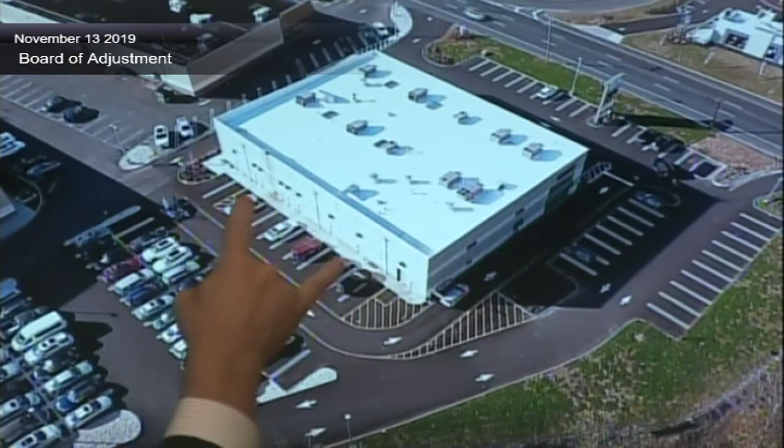Sure, I'll do my best to describe it, and the video should be stationary. On the site plan, if you happen to have copies of it, there were 2 asphalt loading ramps that were put in at 2 of the parking spaces, and it allows a vehicle to be parked, but it's easier to hand truck and wheel materials into the rear door entrances.

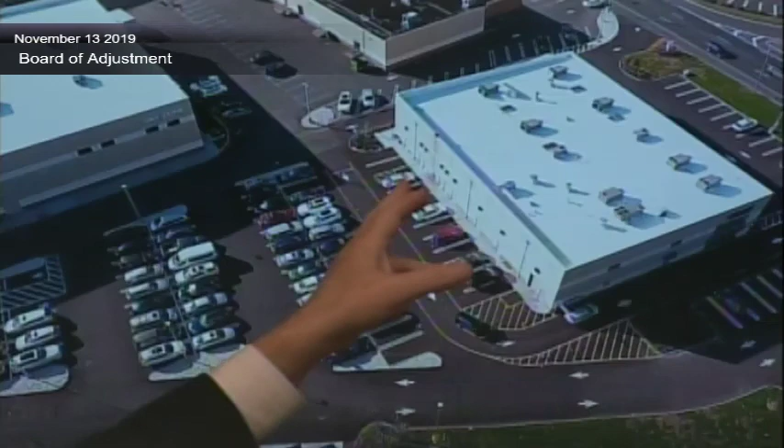My recommendation was we don't want to tear those ramps out, we still want to have access to them. So the idea is, because these stalls are 18 feet long, half of it, 9 feet, would be the drive-through lane, and the other—if it's exactly half, Mr. Titus has a dimension that those ramps are, say, 8 feet, then we'll have a 10-foot lane. But the idea is those ramps would continue to be available.

That may have been the end, that's why I couldn't fast forward it. So I'll just please pause. So the idea is, instead of perpendicular head into the building, we would in essence create the parallel configuration, and the entire drive-through lane that you see would just be moved closer to the building.

But at the very southeast corner of the building, you'll see this cross-hatched door area. That will still allow vehicles to make the turn to get in around that corner of the building. It's not right up against the building. So if you're taking half of the 18 feet, you still have 9 feet to the building.

Yes. Couldn't you do some parallel spots to the building if you pick up some spots there? We could. My thought was, in the event that there's loading, and loading takes 20 minutes, that truck can pull in, occupy what's in between—for example, the ramps—and it lets the drive-through keep running.

So if someone parks there, they better be employees, because otherwise they're... Well, maybe that's what you do. Maybe employee-only parking, and you have some spots that... We can certainly do that, and I'd have to see—we could fit one, it's a little more, so they're parallel, but I'll say one. We could probably fit 3 parallel spots.

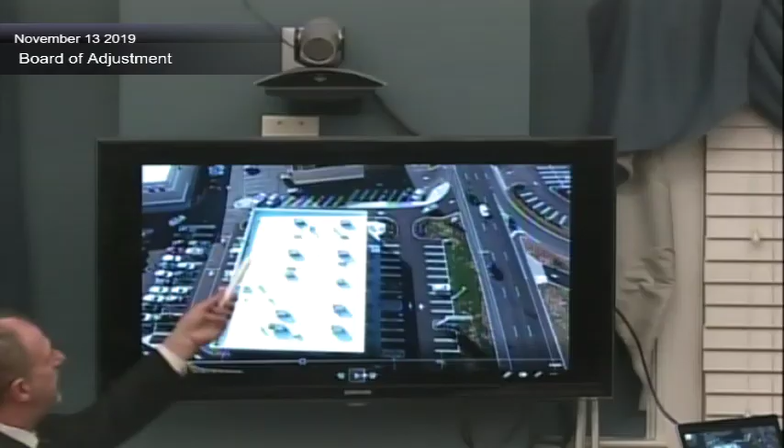It's one of those, if we have ownership interest, if it becomes a problem, that's a good solution. The one challenge of speed humps is what it does to stormwater. We have to make sure we're not creating a puddle in front of the speed hump. And unfortunately, it's not on the picture. I don't know where we have our storm inlets to capture that. I think having somebody hit by a car and then solving it afterwards, when we could probably think about it now and maybe make it safer, would probably be something to think about.

Well, I like to have answers to problems should they arise. I'm not necessarily wanting to solve things that haven't manifested themselves yet. So I always like to have that remedy available. I'm just not sure we're there yet, but certainly, after Mr. Gagliardi, you have commitment from the applicant that he wants it to be safe. Sure, and for liability reasons, it's in his best interest.

Excuse me, Chairman, I wanted to add something. So we looked at this and we had suggested, I don't know why that's striped there, but we had suggested that be closed off. Should this get approved, we suggest that whole island there between the Kinko's and our site be curbed, so there's no cross movement of vehicles.

That's why I think that's why they had striped it. But I think that should be a full curb as well. I think it should be planted or in some way fenced - a real deterrent from allowing someone to come through there.

I agree. The cars are coming off too fast, and there's too short a limited sight distance for anyone to want a pedestrian to cross there. Maybe if they were going to cross, a crosswalk toward the rear of the building. But our recommendation was to close and curb that driveway or island that's partially curbed between the Kinko's and this site.

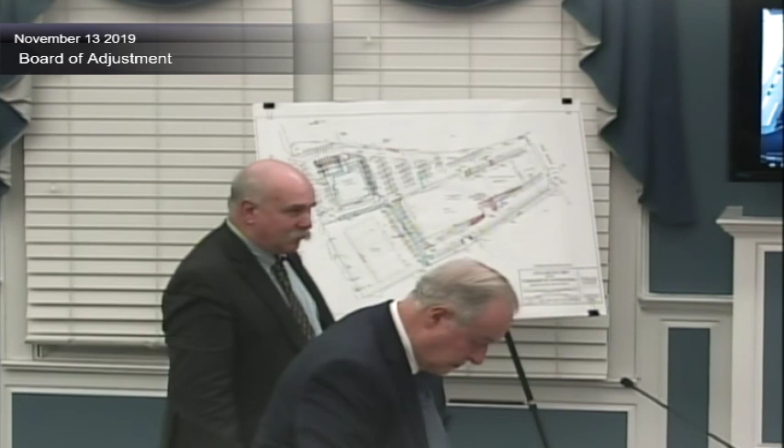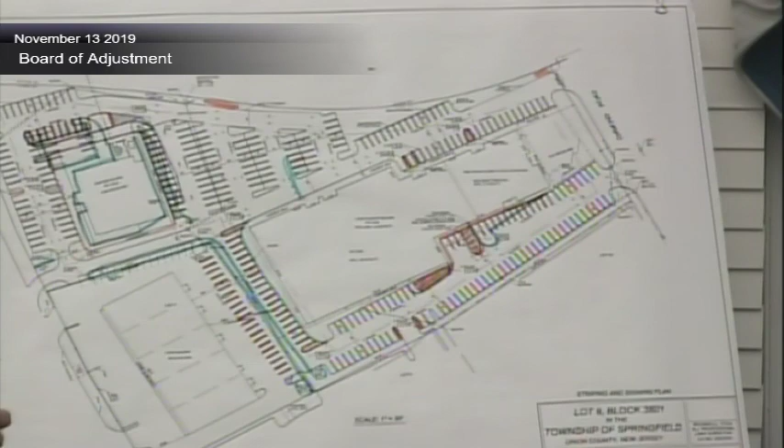The original approval, it was the back building that contained Sky Zone, and we were going to retrofit that building, use the existing building as it was. I thought it was a Burlington Coat Factory discussed. We were going to use the existing building as it was and fix it, not tear it down and rebuild.

And then in the front was a building that was the same size as what's there now. The area of the building that was approved the first time was the same size. What size was that? 13,500 square feet.

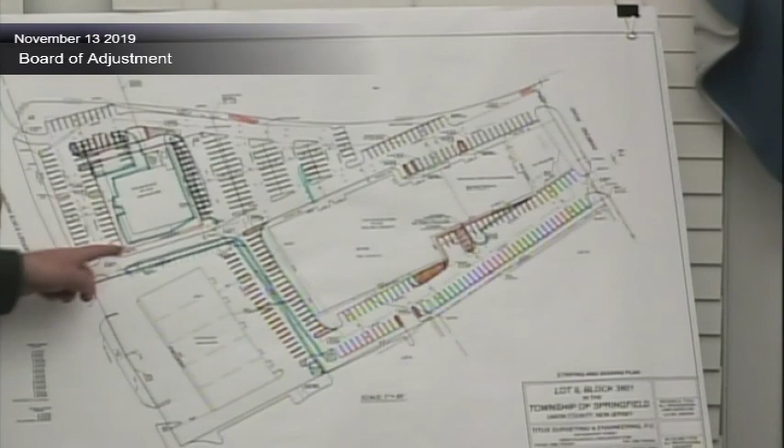The difference was the entrance and the exit were both on the westerly side of the property. But when we went to the DOT for approval, they were worried we were going to short circuit across the center island. There's a U-turn in the center island there, and they were worried the traffic would circulate. So they had us split it up, put the entrance on the west side and the exit on the east side, which is the configuration that the DOT required.

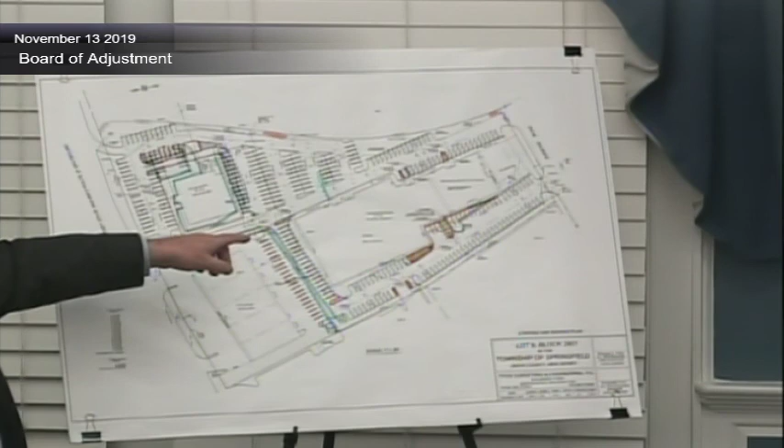But the entrance also came out into the site and then swung back. We were able to convince them that we had control over lot 7, and we could slide the entrance to the west, which freed up some area to create additional parking. So we took advantage of that and slid it over. So the difference between what's here now and the original 2013 approval is the building's completely demolished and rebuilt, but it's the same building proposed in size, 13,500 square feet, which slid a little to the west to give us some additional parking to the east.

And how about the parking that was originally approved? I don't recall that number of spaces.

What I'm showing here is the striping and signing plan with some of the previous layouts superimposed on it. I think we better get this in as an exhibit if they don't have it. I don't think there were exhibits at the last hearing.

And Mr. Titus, what do we call this? What's that entitled? It's a striping plan with previous layout superimposed. I guess we're going to call this A2. When is that dated? November 2nd. So it's current. Yes.

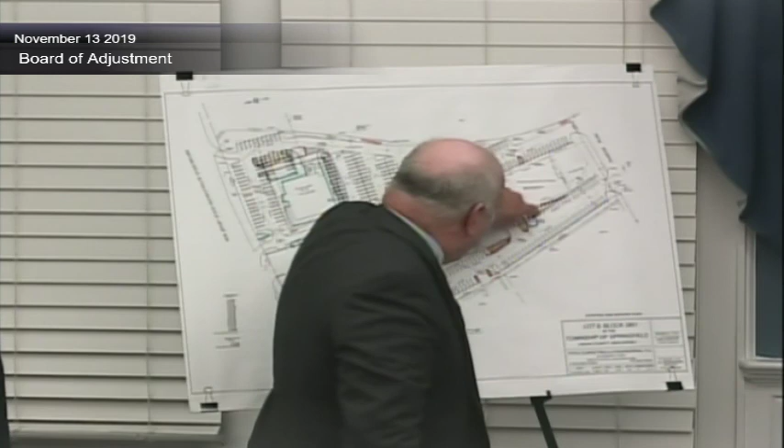So what this is showing, when we came in for Miller's Ale House, we had a loading area in the back of the building, on the west side of the Sky Zone building. It was set up for rolling doors, with 2 loading spaces in there. The tenant didn't need that for Sky Zone because it doesn't have any loading for that type of use. So we met with someone in the engineering department and agreed we could alter the striping in the back. There's a small roll-up door in the back, and we left enough room so a truck could back up to that door if it ever needed to happen. And then we just created a few extra spaces along the side of that building.

Are the extra spaces shown in orange? Those are shown in orange. That's what's there now. The blue is what was originally proposed in the middle when we went to Miller's Ale House.

As we continue around, there was some curbing proposed along the building that was changed to just a striped island, with an additional open area striped out where nobody could park. When we came in for 24-hour fitness, we wanted a cross-through between the two properties, so we created that and eliminated maybe 3 spaces along there.

When we came in for 24-hour fitness, a lot of the discussion was about the amount of parking there. We saw an opportunity to create more parking between the lot on Building 7 and 24-hour fitness. This was originally a 24-foot driveway through here.

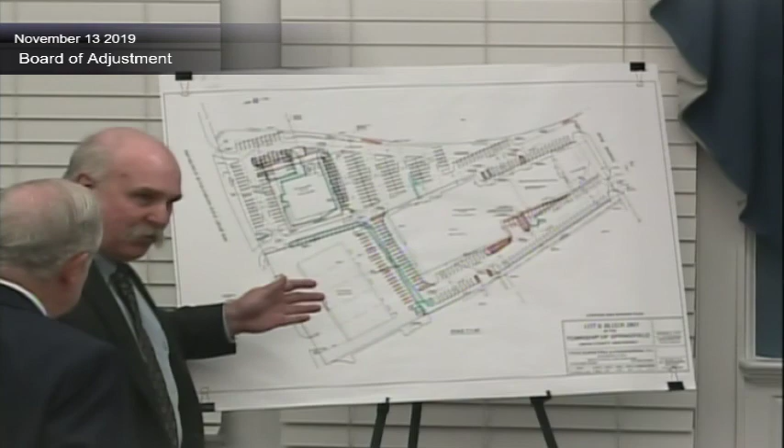There was going to be no parking along the northerly side of Sky Zone, no parking at all along here, and we created 20 spaces along the building, joined up with 22 spaces behind Kinko's or Lot 7 in the back, which is underutilized. Very few people ever park there, maybe a few employees once in a while. So it opened this up, and there's 42 spaces in there that we're proposing as shared parking.

Between the two buildings we eliminated two curb lines - one to the north of Sky Zone, and one to the south of Kinko's. Between the two curb lines there was just going to be some plantings. So that created 42 spaces that weren't there before, that could be used by 24-hour fitness, Sky Zone, or the restaurants.

I'm going to turn this over. A2 consists of two sides. No, the first - or you want to mark this as A3? We could do that. Let's mark it A3.

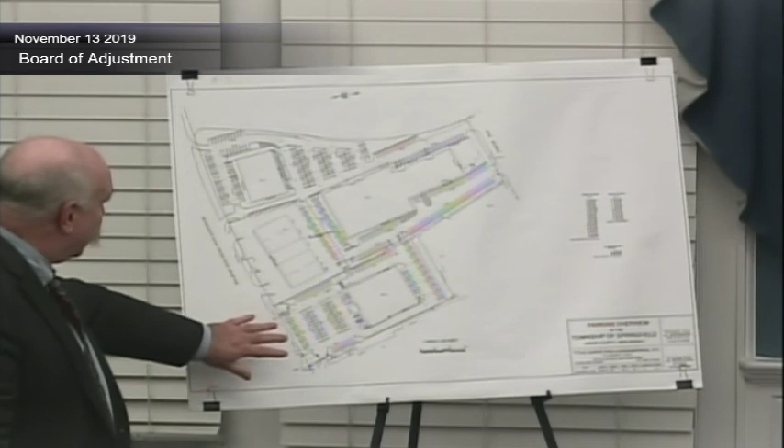This shows both sites together - the 24-hour fitness site to the west, and the Sky Zone, Krispy Kreme, Lot 7 to the east. This shows all the parking for 24-hour fitness and how it would interact with this site.

We do have a crosswalk between 24-hour fitness and the parking behind Lot 7 or Kinko's. That was proposed on the original site plan, and it was discussed at the meeting that people from 24-hour fitness would be able to utilize this parking as additional overflow parking.

There's also a sidewalk at the cross-through between 24-hour fitness and the Sky Zone building, with a crosswalk so pedestrian traffic can get between the buildings. So this area is set up as overflow parking for 24-hour fitness, but there's also overflow parking for Sky Zone and Krispy Kreme.

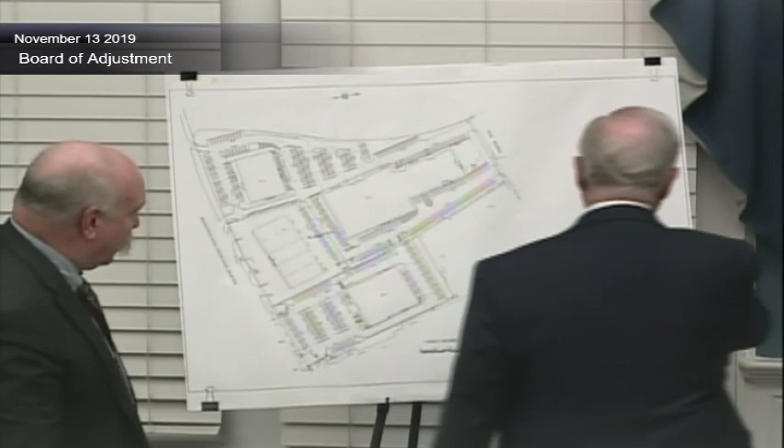So how many parking spaces between the three properties? There's 231 on site on the Krispy Kreme Sky Zone site, 133 on Lot 6, which is the 24-hour fitness site, and 42 shared parking spaces in the area between Lot 7 and the other lot. There's like 408 spots altogether from our arithmetic. It's fairly decent. Is that about right? That's about right.

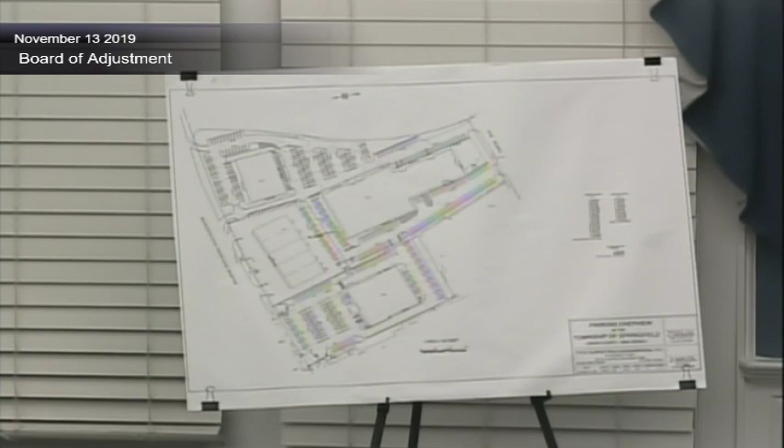What you have is three properties working harmoniously together. Correction - you're also using Lot 7, Kinko's, so that's four. There's Lot 6, Lot 7, and Lot 8, and then Krispy Kreme - this is all one lot with two principal uses.

So, three properties - but realistically, a good amount of those spots are worthless for someone going to Krispy Kreme or Moe's or whatever's going to be there. Most people probably won't walk a half a mile for a donut. We were discussing a crosswalk between this area and maybe this side of the parking area, so somebody would actually use that.

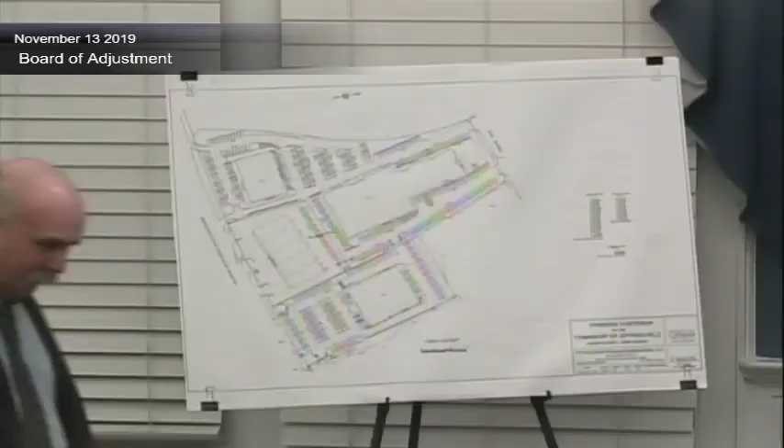What is the total deficit between all the properties? If you were to add up what was supposed to be, what is the deficit? I can give you a quick calculation from what they just provided, as far as the deficit of all the spaces that exist on the three properties, and what's required pursuant to what's existing on the site.

There are 401 spaces on all three properties - 231 on Lot 8, 133 on Lot 6, and 37 on Lot 7, unless there are spaces in the front I'm not counting. That's 401 spaces. Alone for Lot 8, 336 spaces are necessary, so there's 64 additional spaces for 24-hour fitness and the retail building that has the Kinko's store in it.

It sounds like there's a deficiency greater than what's being provided there. I also wanted to address one other thing, because Mr. Schnitzer did send me the parking agreement, but the parking agreement only covers Lot 6 and Lot 8. There's no parking agreement—I don't know if it's because it's proposed as part of this application.

The parking agreement only encumbers Lot 6 and Lot 8. Lot 7 is only included as part of a pass-through, an access agreement to get between the two sites. When you read through the parking agreement and the Exhibit C, it shows how many spaces are shared between Lot 6 and Lot 8, the subject property. 240 spaces are shown, including all the spaces on Lot 6 and 93 spaces, including the shared parking. The 42 spaces that they found are already encumbered by a shared parking agreement with Lot 6. So they would be sharing at least the 20 spaces on Lot 8 with Lot 6, Lot 8, and Lot 7.

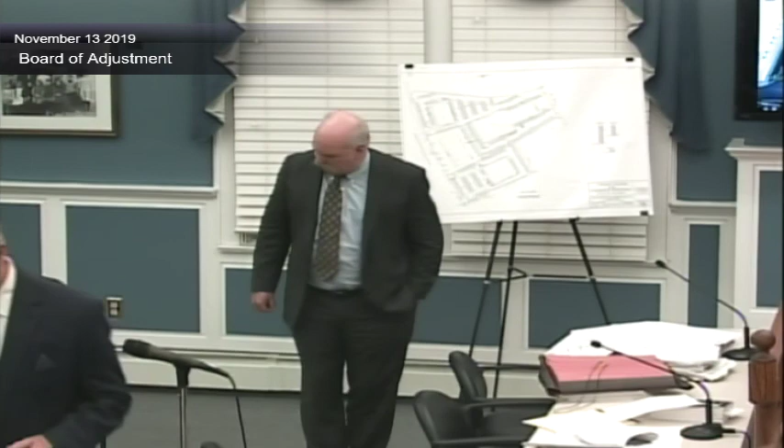I think that's also because the uses were significantly different than the uses that are actually present and may be occupying the buildings. Well, we know the testimony was for 24-Hour Fitness, that they basically heard most uses were early in the morning or late at night. During the day, I didn't think they had that much use, but they wanted to make sure they had some shared parking in case there was an overflow.

Yeah, but you have Sky Zone in there now. It was a proposed Burlington Coat Factory. I don't think that the traffic for the Burlington Coat Factory was anticipated to be anywhere near the traffic that the Fun Center is presenting. Obviously, the Kiddie Academy isn't doing a whole lot there, but you've got completely different uses, and based on the uses, parking becomes troublesome.

But proof was shown by the parking as shown by Mr. Dean. We're looking at something that isn't telling a true picture, though, because the other tenants aren't there. So we really have no idea. It's important for us to make a sound decision for the safety of the people utilizing that facility. Right now, based on what he's shown with the drones, yes, it seems fine. But when you open up the other 3 or 4 stores, the potential becomes more problematic for us in trying to distinguish whether the parking is truly adequate or truly inadequate.

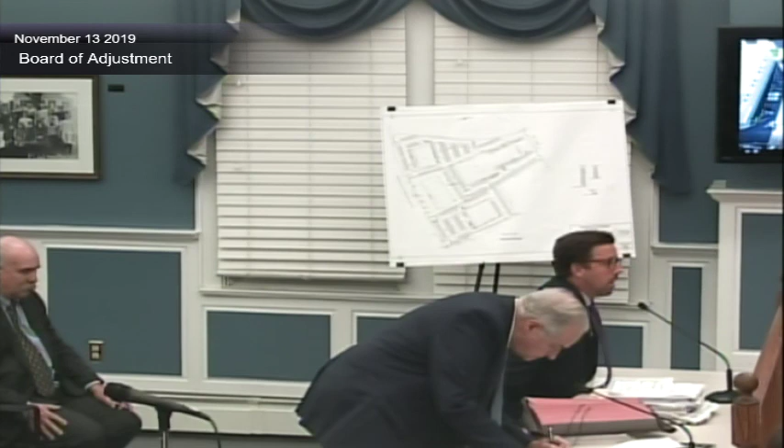Do you swear or affirm to tell the truth? Yes, I do. Please state your name and your address. Sure, it's Justin Auciello. The address is 125 Half Mile Road, Suite 200, Red Bank, New Jersey, 07701. It's Capone Consulting.

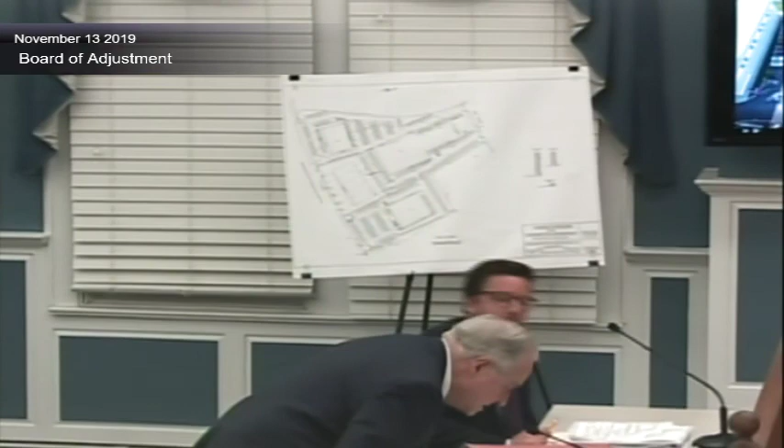Mr. Auciello, are you a licensed planner of the state of New Jersey? Yes, I've been licensed since 2007, and my license is current.

Would you tell the board a little bit about your experience where you've appeared and testified as a licensed planner? Yes, absolutely. I have a master's degree in city and regional planning from Rutgers University, 2005. I've been practicing planning since then. I've been licensed since 2007. I've appeared in 19 of the state's 21 counties, on hundreds of occasions on a variety of matters. I've also been involved with master planning, the whole kind of gamut of planning, from master planning to redevelopments. I worked on a variety of similar applications to this one. I also teach land use at Rutgers University, and that pretty much sums it up.

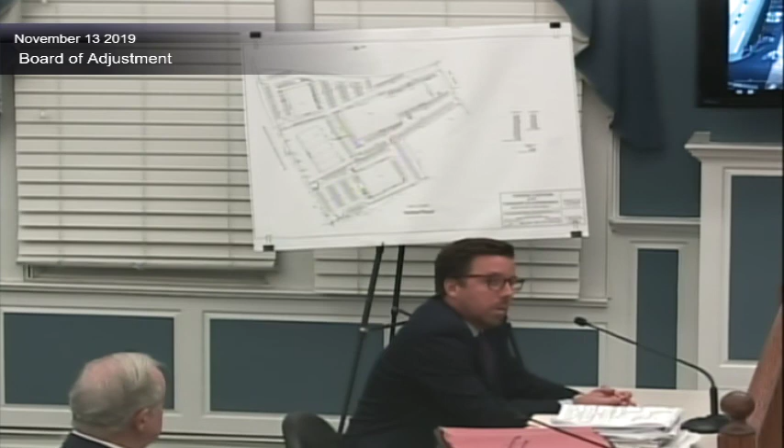It's a showing of whether or not the proposal will present a substantial detriment to public good, whether there will be any substantial impairment to the zone plan or zoning ordinance, and finally the enhanced quality of proof, which speaks to the omission of the use from the zoning.

Starting with particular suitability, I believe this use is suited. Granted, the underlying zone, the HC zone, does not permit this use directly, which is why we're here for the use variance. The HC zone does permit restaurants as a conditional use. Even though we're not within the strict letter of the law with respect to a restaurant, in my opinion a fast food use is quite similar to a restaurant use permitted as a conditional use subject to certain standards. So I think this use, even though not permitted directly, is quite consistent with the type of use permitted as conditional use.

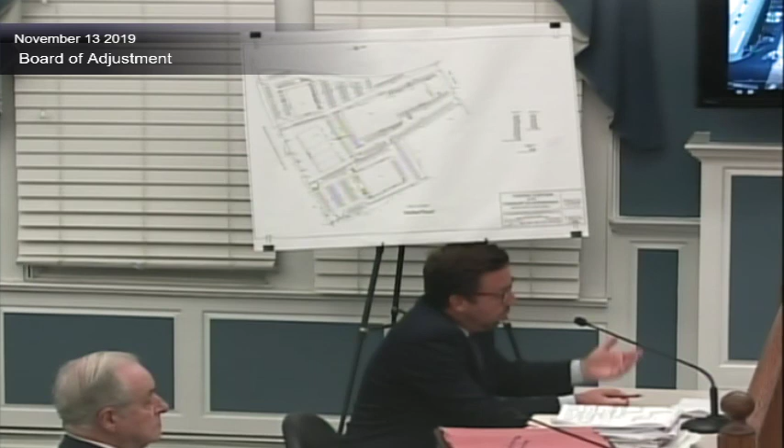When we're looking at particular suitability, it speaks to what makes this site suited for this use. I think, number one, we are located along the Route 22 corridor, which is the precise location where you can see a use that is auto-dependent.

Also, in the HC zone, even though the ordinance does not permit fast food anywhere in any zone, there are a variety of fast food restaurants all within 2,000 feet of this site. I'll name four: Chipotle, Saporito Pizza, Five Guys, and 7-Eleven. 7-Eleven is not a fast food use per se, but it has certain characteristics similar to a fast food use.

Also, you heard previous testimony from our traffic engineer and the site engineer relative to the layout and arrangement of the site, and I think that also makes this site particularly suited for this use.

Lastly, this site has already received approval for a restaurant with a pickup window, not a drive-through. So even though there is a distinction between a drive-through and a pickup window, I think the overall usage of what's going on in the building is fairly consistent with that prior approval. So that's the particular suitability.

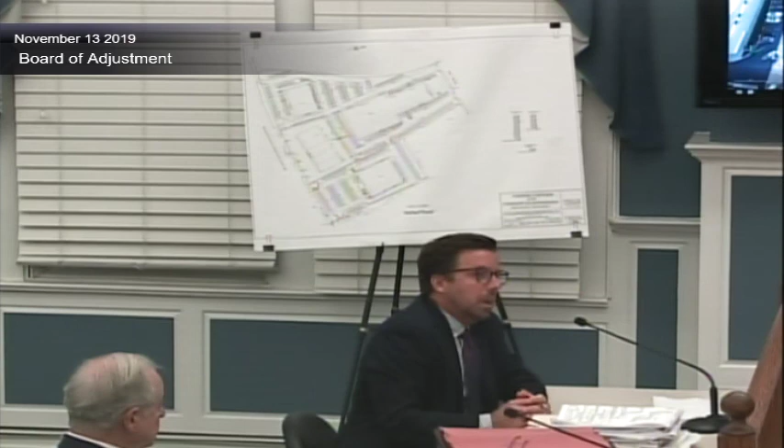But we are currently cutting that deficit in half. So I think even though we do require a variance for the parking, I believe the applicant has made efforts in working with the board and the board's professionals over the years to attempt to reduce that deficit and also make it more amenable to overall circulation, flow, and function of the property. So from the perspective of being a C variance, I think the benefits of granting it outweigh the detriments, and I believe this site will be able to function.

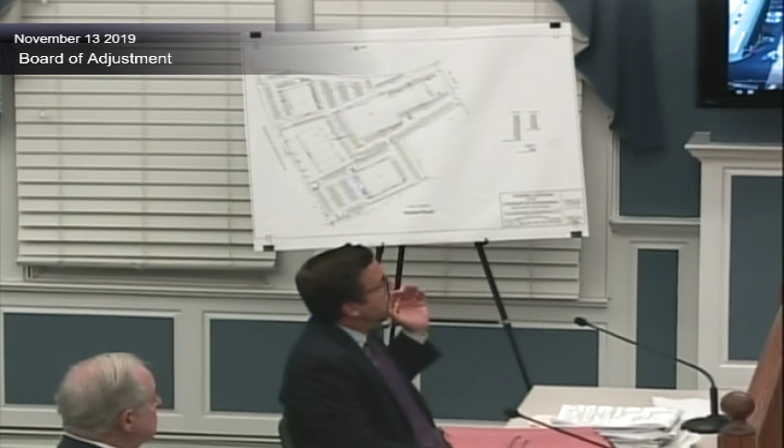You heard testimony from Mr. Dean. He's willing to work with the board's professionals to find a solution that will accommodate the site and ensure proper flow and parking arrangements.

You didn't mention that the approval for Dunkin' Donuts, which is in close proximity to this property, in the center island, also has a drive-through lane, doesn't it? Correct, that's correct. So we are consistent with a neighboring use that has the same usage proposed tonight. I have no further questions.

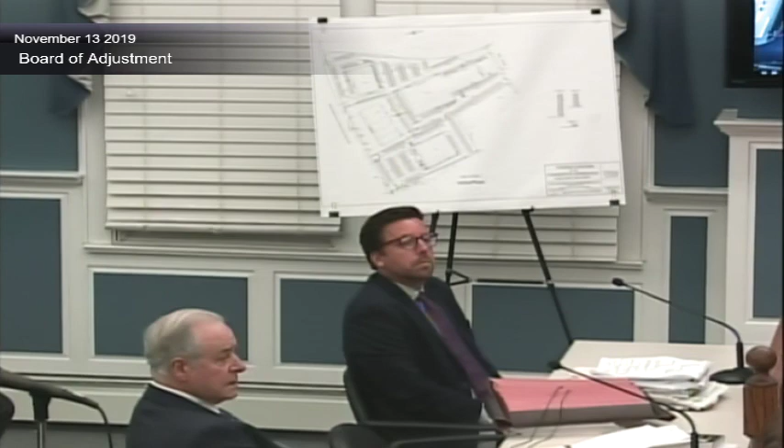The point is the parking, as opposed to the 2015 and 2014 approvals - the parking on lot 7, particularly right in that view, the stalls to the east on the lower portion of the screen, were not in that location during the prior approval. That curb line was wholly within lot 7. As proposed, that curb line and those parking stalls straddle the lot line between lot 7 and lot 8.

The ones at the bottom near Kinko's, right at the base of the TV screen - what happened is these parking spaces along the southerly side of lot 7 got shifted northerly a little bit, and the aisle between... those stalls, prior to this presentation coming to this board in 2019, as shown on the prior plans, were wholly on lot 7. Now, as shown, as built today, and as shown on your plan, they straddle the property line.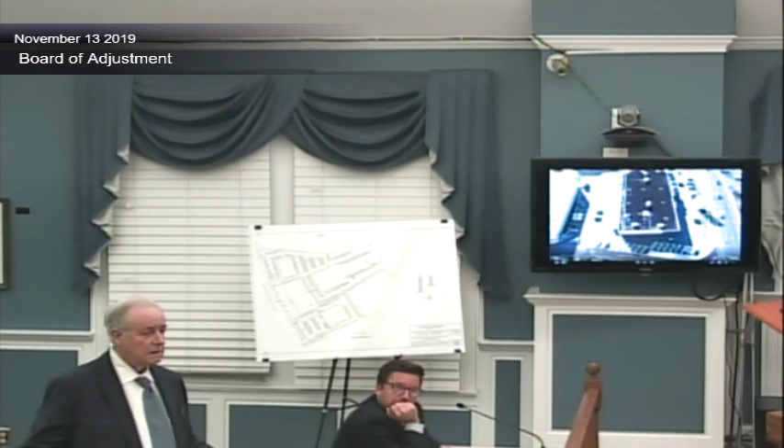And so the parking deficiency would be the 83 goes to 105? It would be about 100. The 83 was including taking out the shared parking, so it was 63 prior. So you take out, you add another - it's 85 now. Okay, and 63 plus the prior 22.

The prior approval, I think, was 251. Yes, the prior approval was. The 2015 approval was 251, 2016 was 251. So I counted the parking on the site plan and I came out to 251 on Lot 8 alone. And so if that is true, then the parking deficiency is therefore 85 spaces. Correct.

So these are just here, you know? They're just here, and they serve whoever they serve. They serve Lot 7 because they're located on Lot 7. If people choose to park there, then they choose to park. Somebody chooses to park there.

Okay, but can we still ask for them to put up some kind of fencing? Because it's on their property. Yes, the curb and the island is on Lot 8, this application's property.

Okay, we'll agree to that. So you'll have the fencing, as I understand it - wait, they changed the site plan around here.

Yes, I think that's what they discussed. Thank you, I understand. We'll agree to do that.

It's a little breezy. Mr. Chairman, I just had a few comments for the planner's testimony as well.

I just want to clarify that the parking variance being requested tonight, and the reduction in the parking deficiency, is not based on them providing additional parking. It's based on the use requiring less parking. I just wanted to make it clear that they're not providing additional parking to mitigate the situation. No, it's the use that's reducing that number.